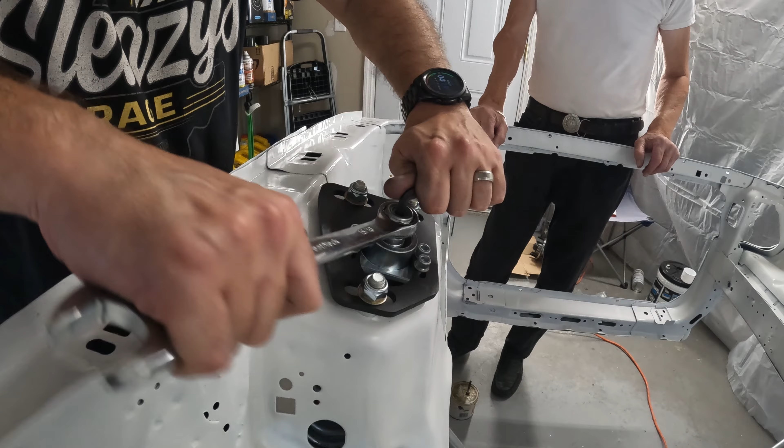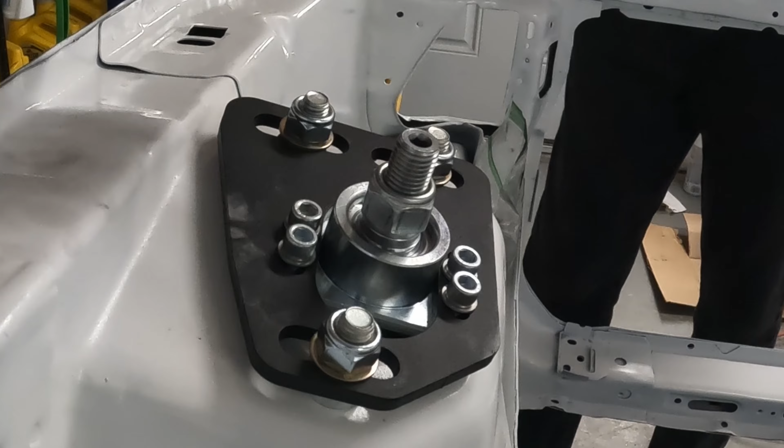Last week I noticed I was missing two of these bolts from my old setup, and I don't know exactly where they are. I looked everywhere, thought I had them in a bag or left them on the spindles, but I didn't. So I ended up buying some new ones from LMR, and I'm going to put these in first.

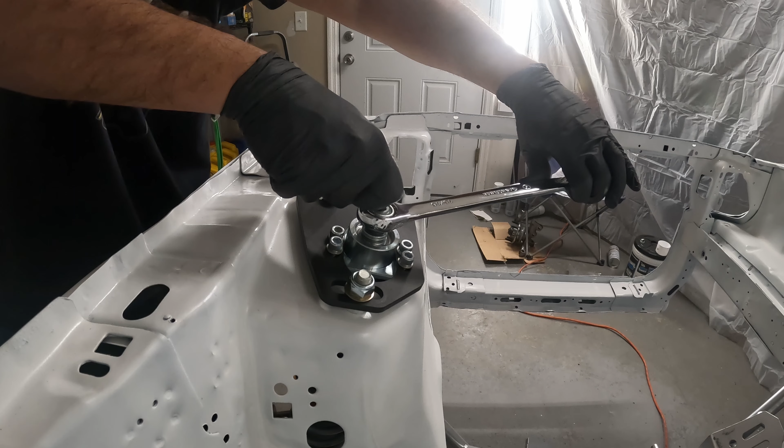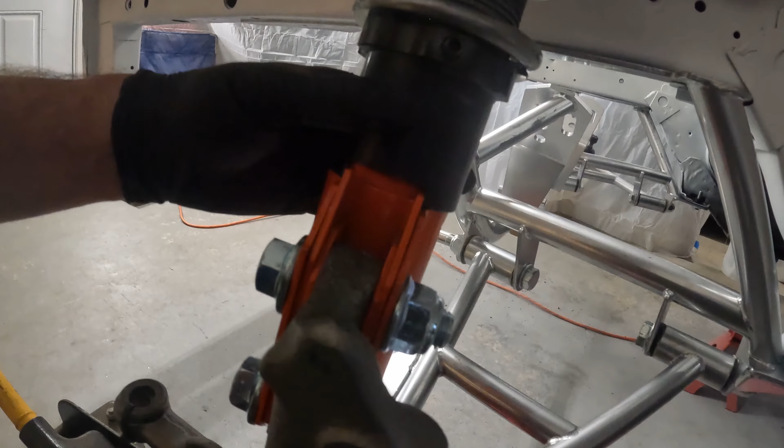A little bit more we have to do. I have to clock this a little bit, which involves loosening it up from the top. That's clocked correctly - this was the clocking I needed to do. This has to be up on top of here. We'll adjust the height when it's around.

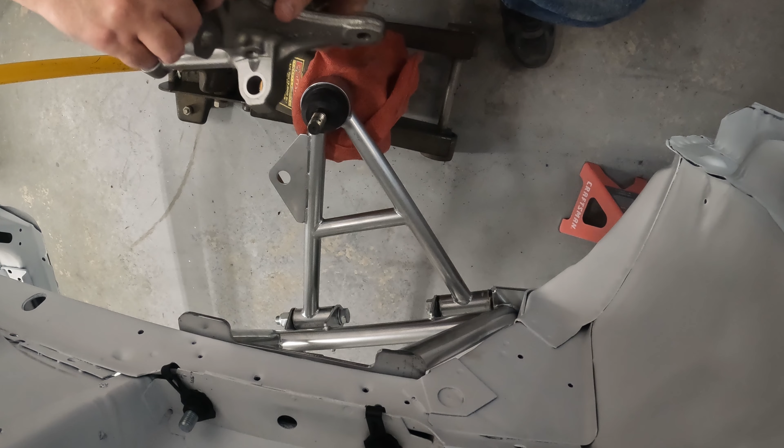You okay, buddy? Wow.

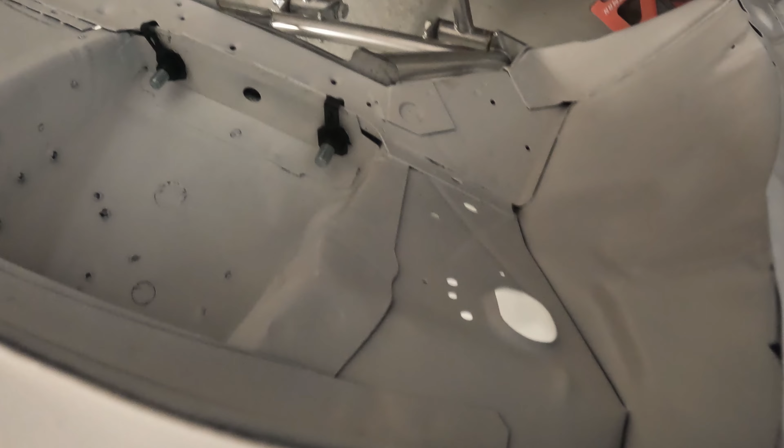Oh no! I've already destroyed my camera. The back screen got messed up.

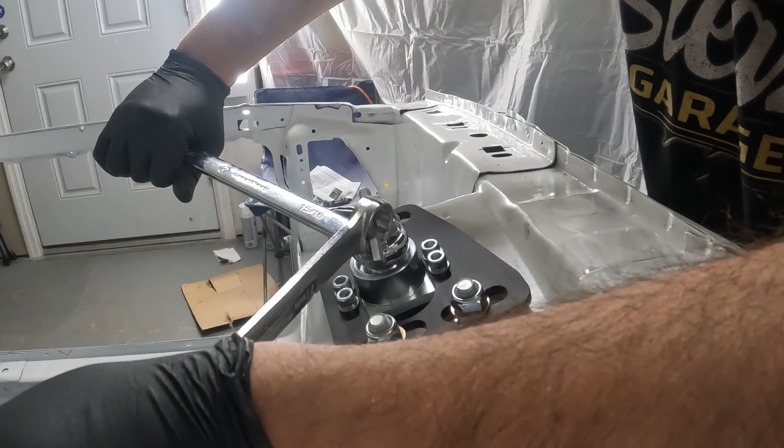That's good. I'm going to have to torque these down though, because these are moving a little bit.

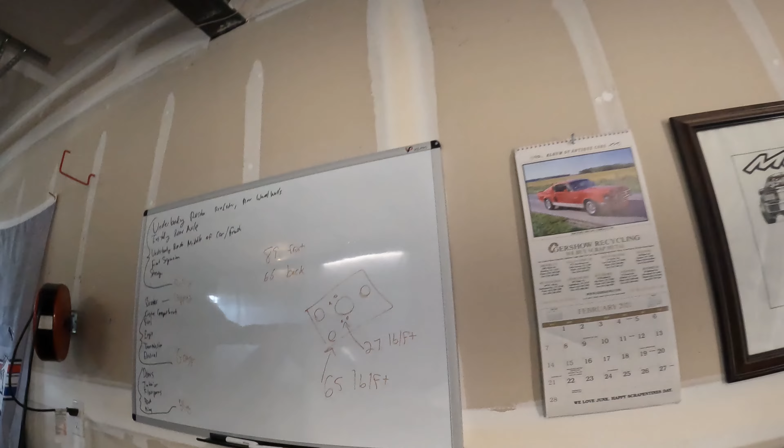Back in action. Alright, so I wrote down some torque specs. The outer three big ones are 65 foot-pounds, the little guys are 27 foot-pounds.

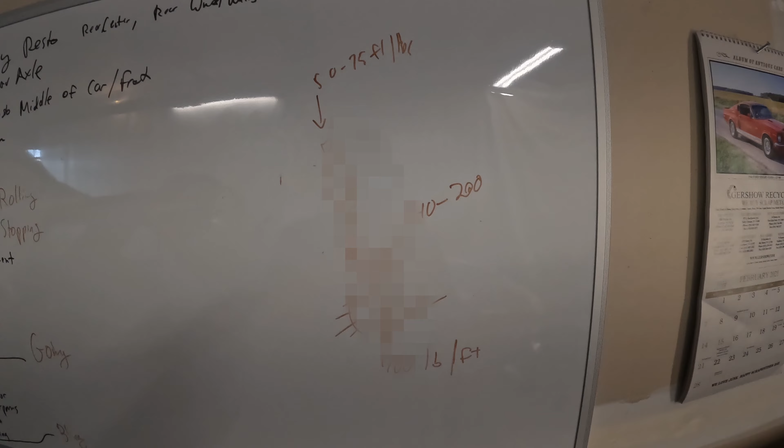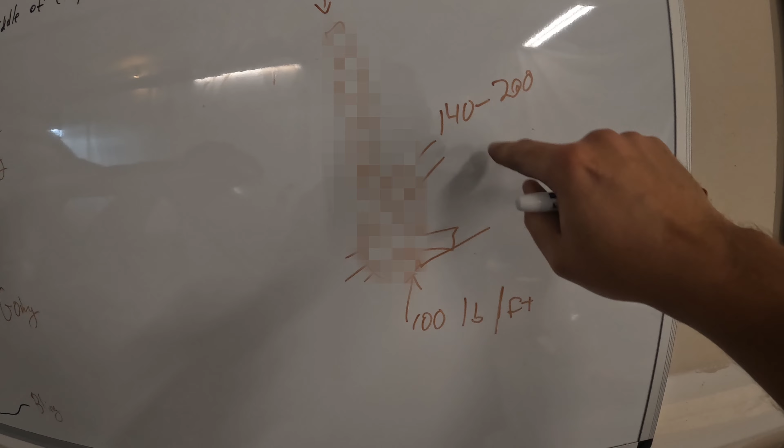Alright, a couple more torque specs. This is the spindle, this is the coil over the top. It's just the suspension - 50 to 75, 140 to 200, and 100.

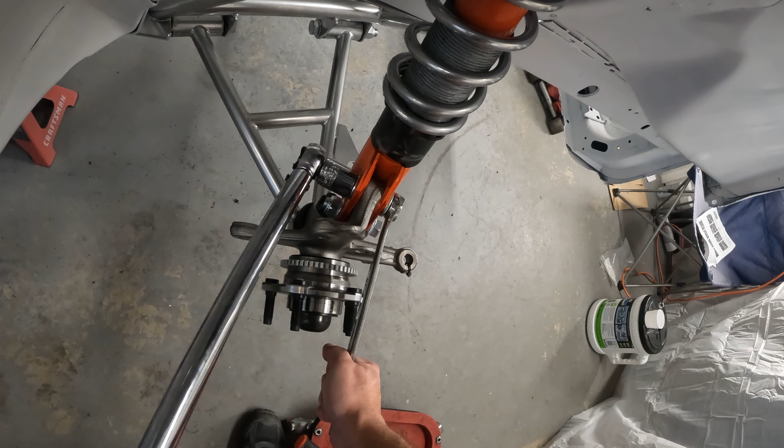How am I supposed to do this like this? No way, can't do it. This is a 7mm for this little zerk fitting.

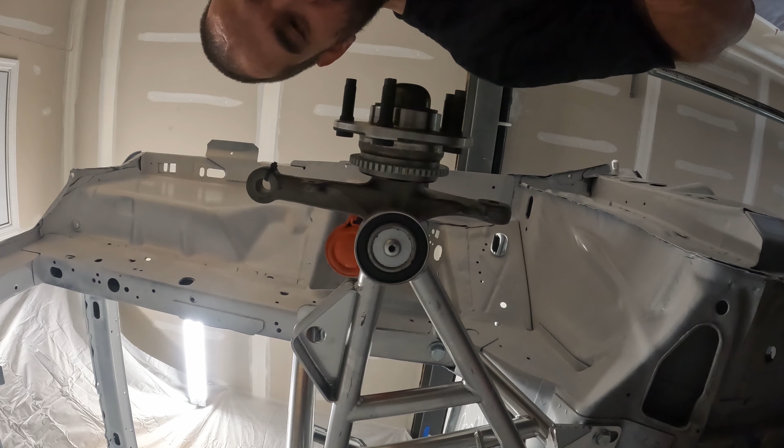Cool, right here - the zerk fitting that UPR sent me. I'm not sure if you can fully focus on this, but you can kind of see that it doesn't go in right. The threads are a little jacked.

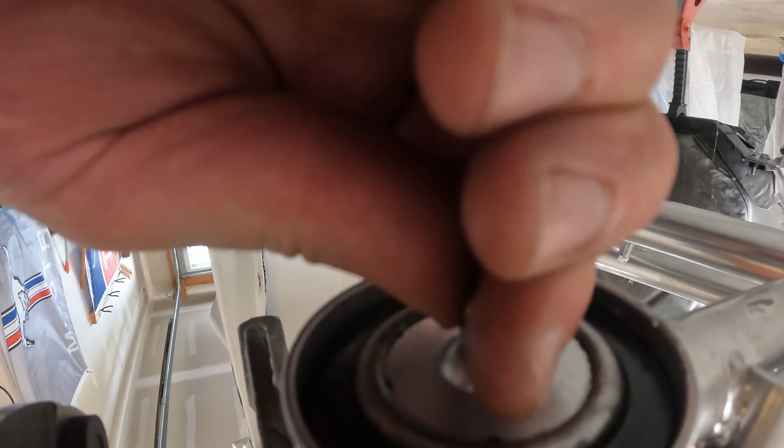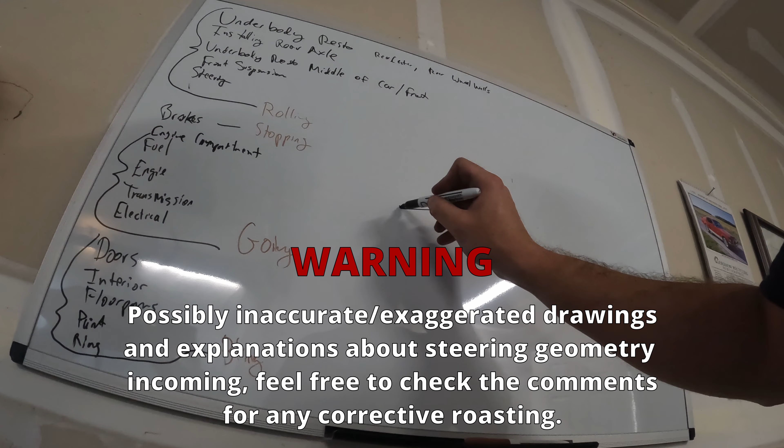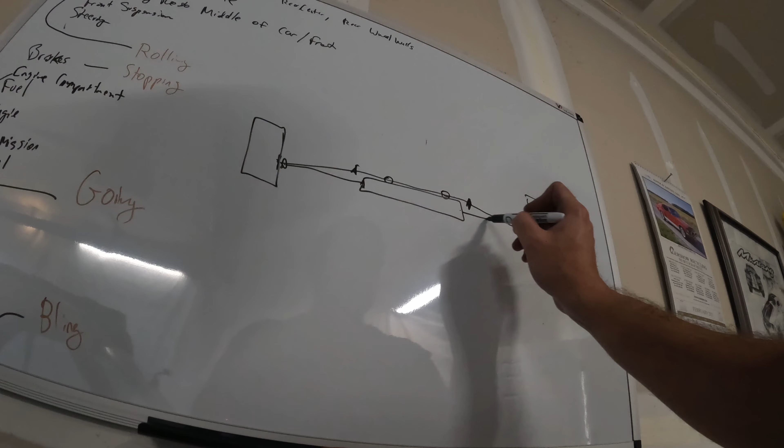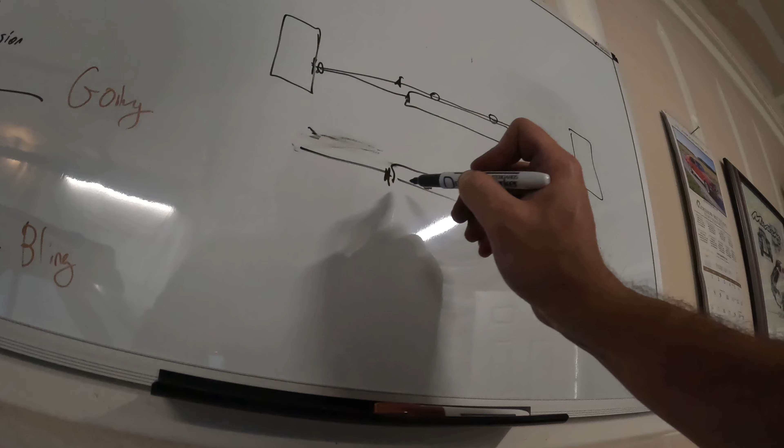Now if you look at the normal Mustang, this is the control arm, that's the wheel, then the steering rack connects to that. Here's the other control arm, here's the wheel, here's the tie rod. When you lower the car, this angle flattens out - flat control arms, steering rack, and now your tie rods are going upwards. This leads to bump steer.

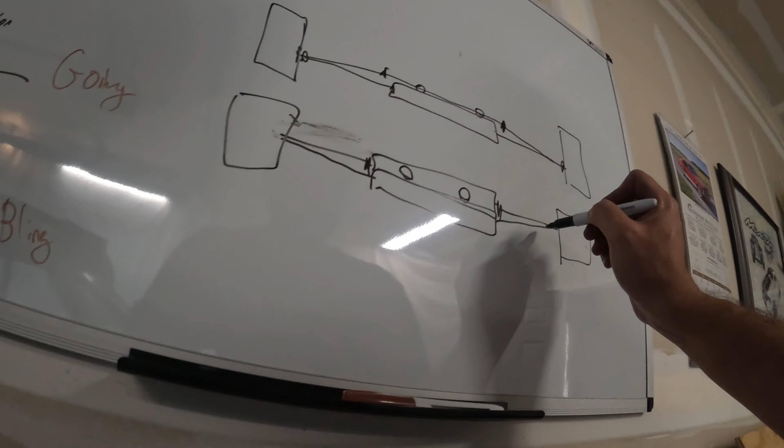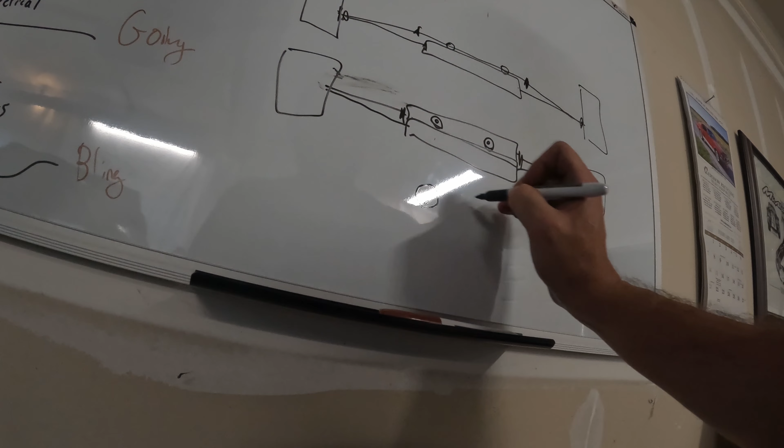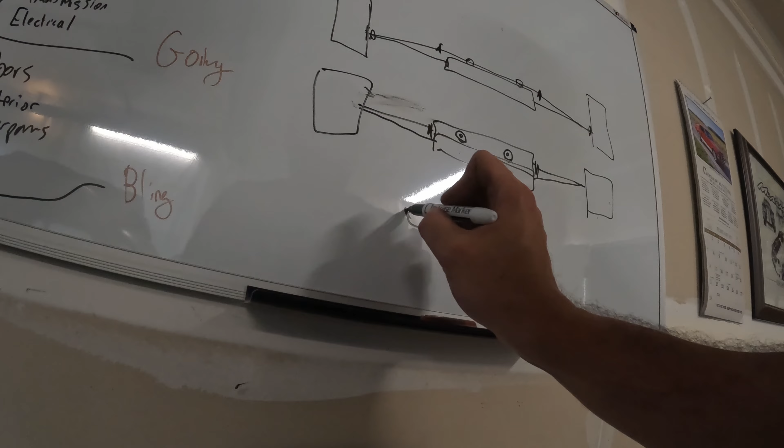So the idea is you put in offset steering rack bushings to lift this up. So if this is like that, like this - the steering rack moves up a little bit, and then that leaves you with flat steering.

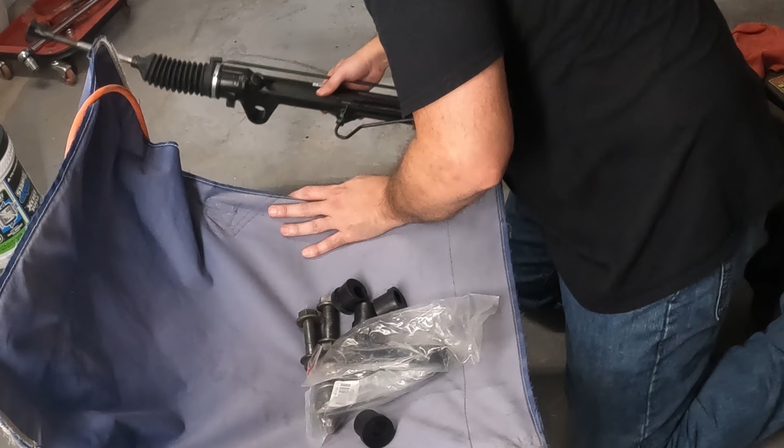Now let's look at that in practice. This is the steering rack - here's a good example, this is a stock steering rack bushing that the rebuilders didn't take out. So you see how it's flat like that. By pushing it like this, it lifts the rack upwards.

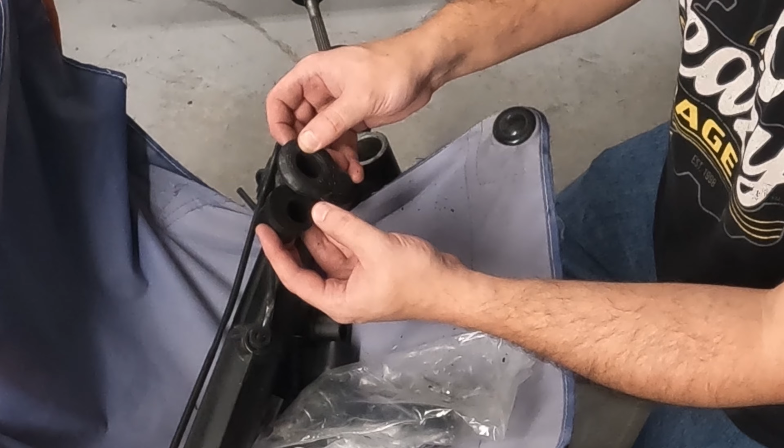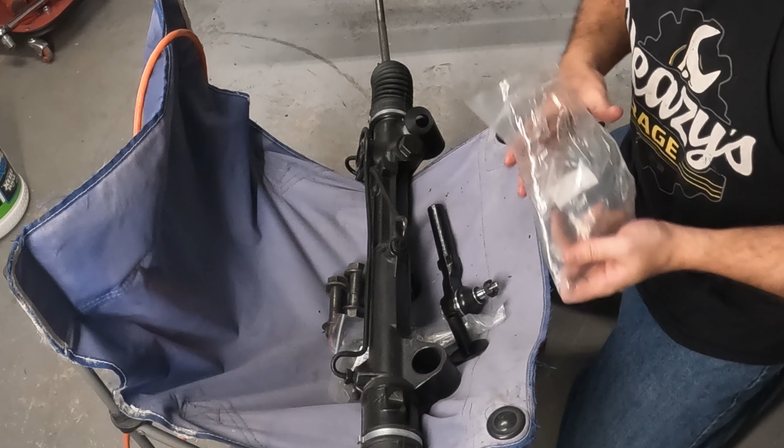One other thing to note is this is a steering rack from a 2003 Mustang GT. The reason why is because the newer model has variable rate valving. This one has a cotter pin - there's supposed to be a jam nut on this.

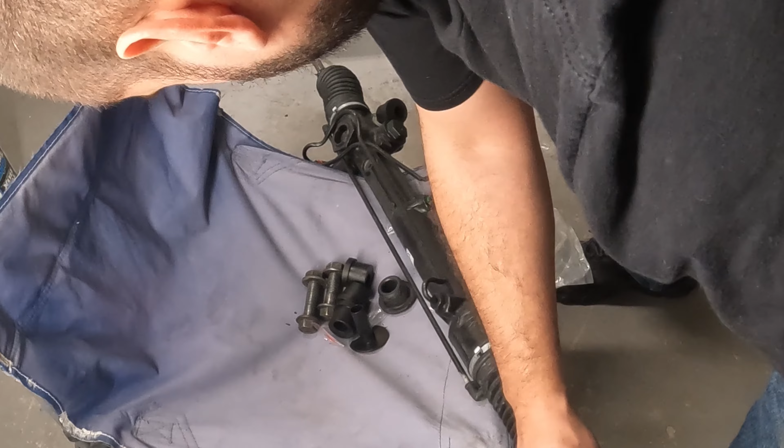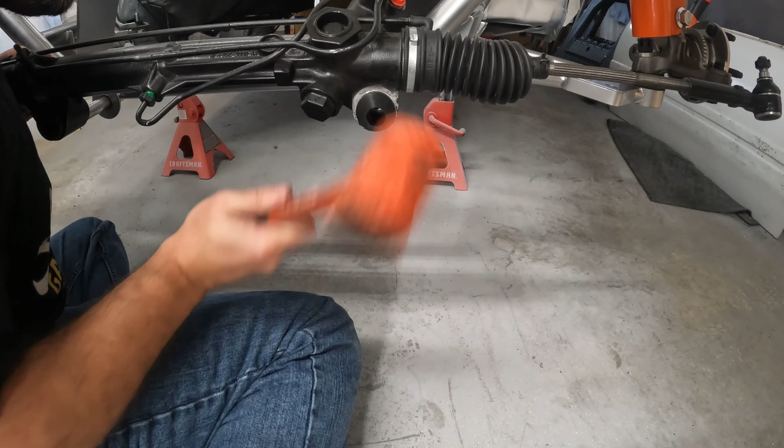Alright, so we can't hook this up completely yet because we're going to have to take these off and put the jam nut on. Let's see if we can get these in. Alright, that one's going in.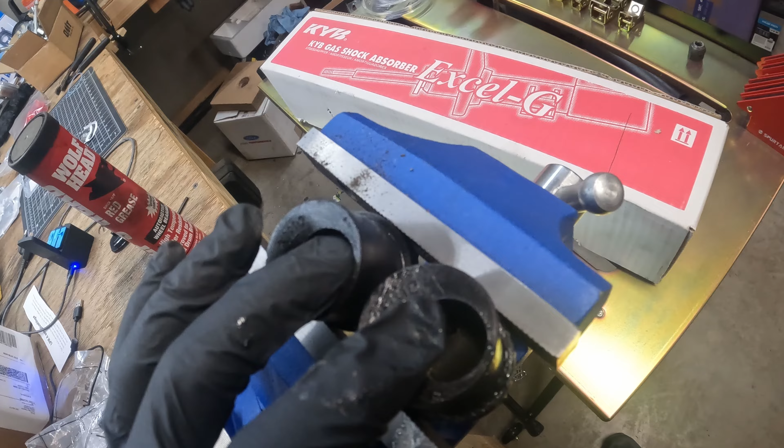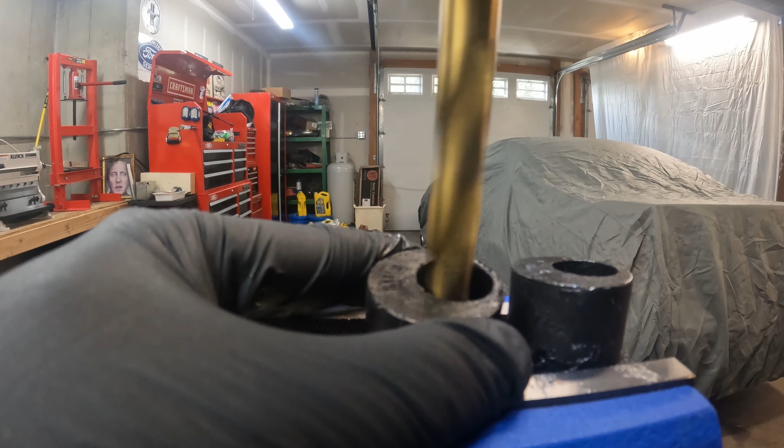So if you look inside you can see that it's kind of bunching up. I think the reason why is because these were built for a stock sleeve, which is slightly less toleranced than the UPR K-member has. So I'm going to try to find a drill bit to take like a thousandth out of both of these so they'll fit a little better on the right side. Alright, slightly different approach - put these on first.

Alright, so it's fully seated in there, fully seated in the front, over there. Just to give a quick idea how this is supposed to work - okay, that's a problem, till we get to the bottom of this. That's hot rodding, right? Yeah, I think we got to the bottom, and it didn't even line up. Might have to cut some of this off. And then this is supposed to go in here, and that controls your steering.

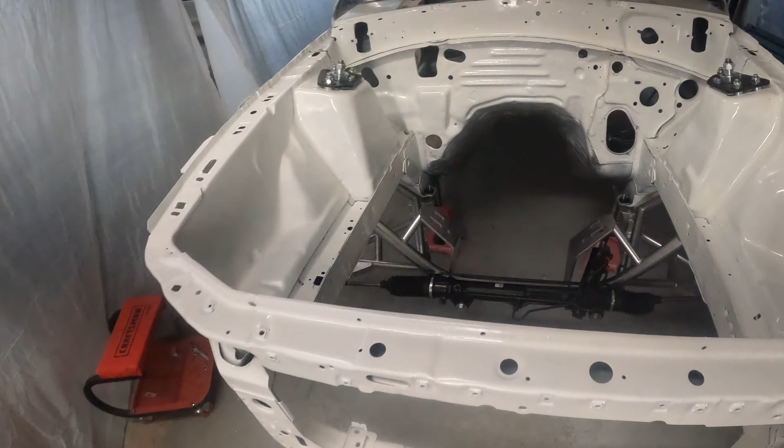Okay, well, interesting - alright, so we're at a bit of an impasse in the front, we'll figure it out. Alright, well I'm kind of exhausted, but we did manage to get the front suspension in, as well as the steering rack. Looks like I'm going to have to look into the Fox outer tie rod. That said, I'm glad it's all in there, because that was a bit of a nightmare squeezing those on. So next episode, maybe I'll be finishing up the steering and then starting to get that rear suspension in so I can put the rear axle in. Thanks for watching, I'll see you next time.

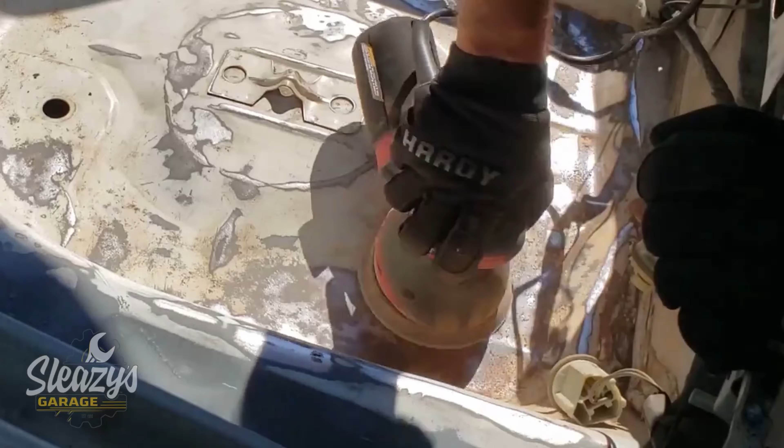Wow, that hurt. Okay, yeah. Alright, never doing that again, that's for damn sure.